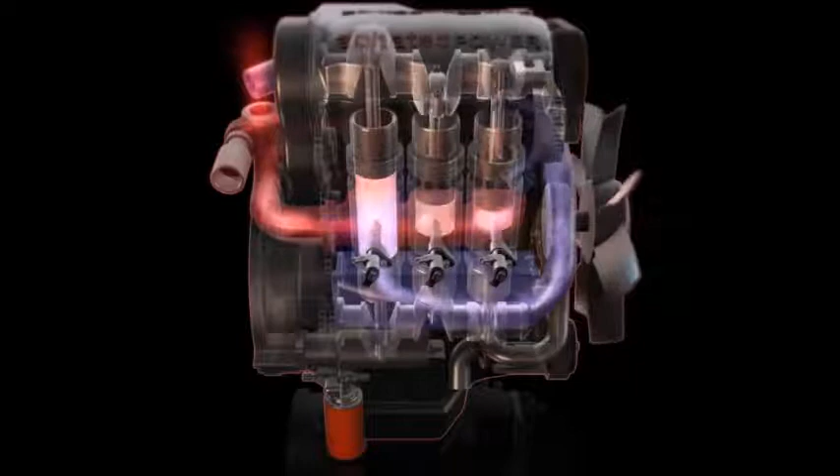Hello everyone and welcome. In this video we're going to be discussing the rather unique opposed piston engine that Achates Power is developing, which has shown to have pretty impressive efficiency figures.

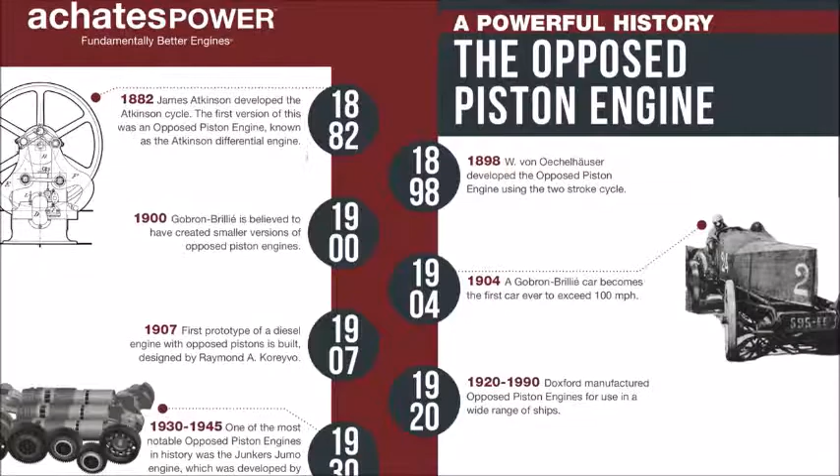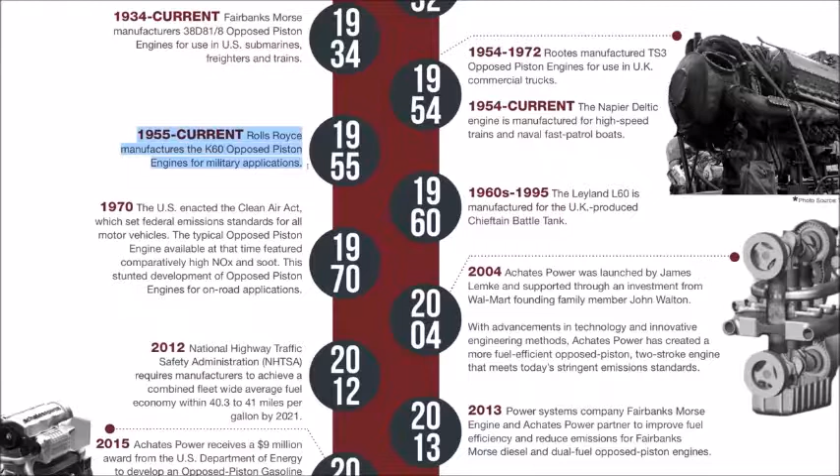Now the first opposed piston engines date back to the late 1800s, and they've seen use in ships, airplanes, submarines, tanks, trains, and other forms of transportation ever since. Rolls-Royce even developed an opposed piston engine for use in military applications in the 1950s.

Having a look at the engine, you'll see that two pistons move towards one another, meeting at top dead center where combustion then occurs. These engines operate as two-stroke engines, meaning every single time the pistons join in the center, the power stroke occurs, unlike four-stroke engines.

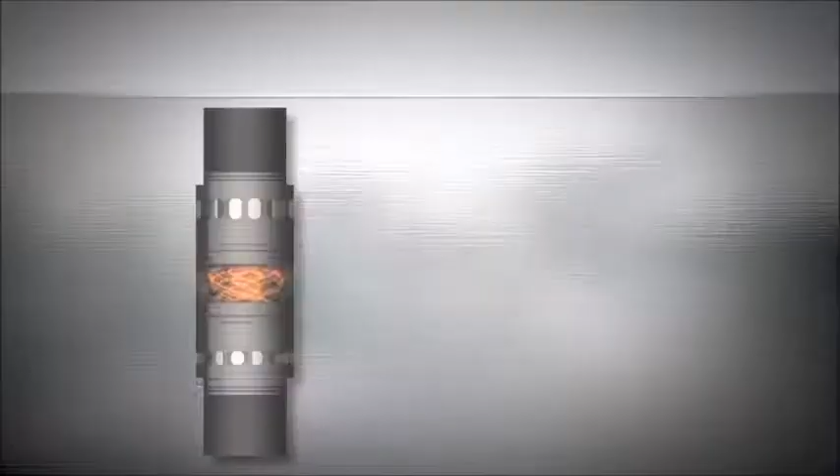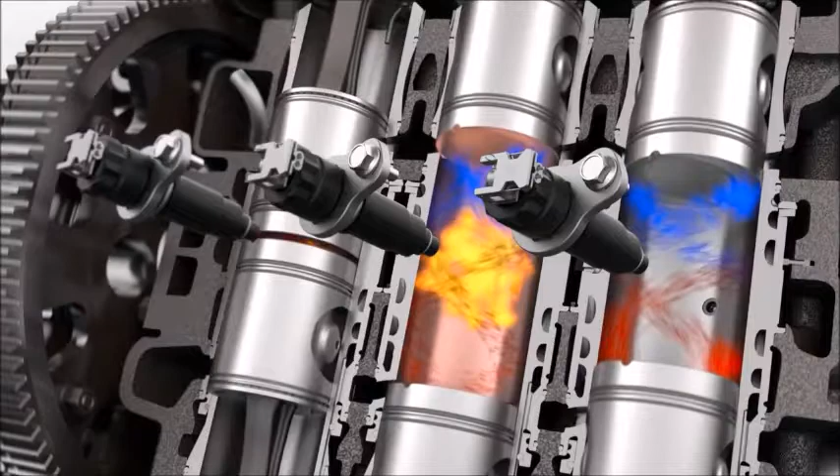The basics of how this engine works is fairly straightforward. When the pistons reach bottom dead center, fresh air is pumped in through ports on the bottom of the cylinder, while the exhaust is pumped out through ports on the top of the cylinder. The two pistons then move towards one another, and just before meeting in the center, diesel fuel is injected directly into the cylinder. There are two injectors for each cylinder, both facing one another on opposite sides. Combustion occurs, pushing the pistons back out, and then the cycle repeats itself.

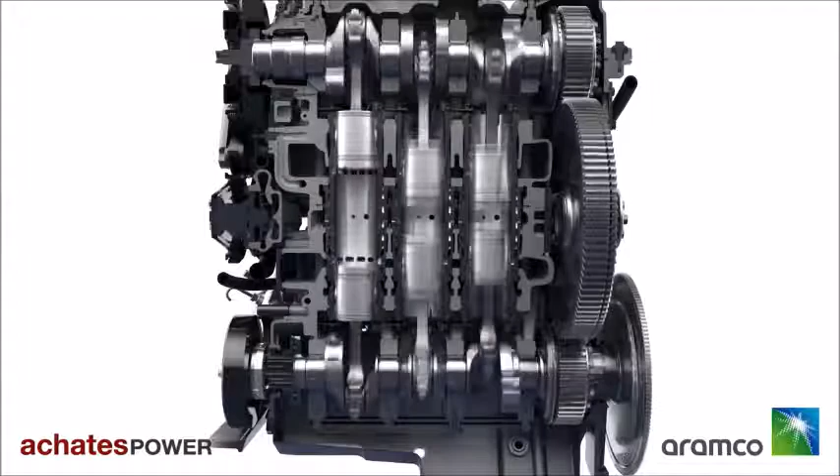The top pistons and bottom pistons each rotate an individual crankshaft, and these two crankshafts are then geared together to supply power to a single output shaft. Now, while having two crankshafts may seem like an additional complexity, this engine has no valve train, meaning no camshafts, rocker arms, valves, valve springs, and even no cylinder head.

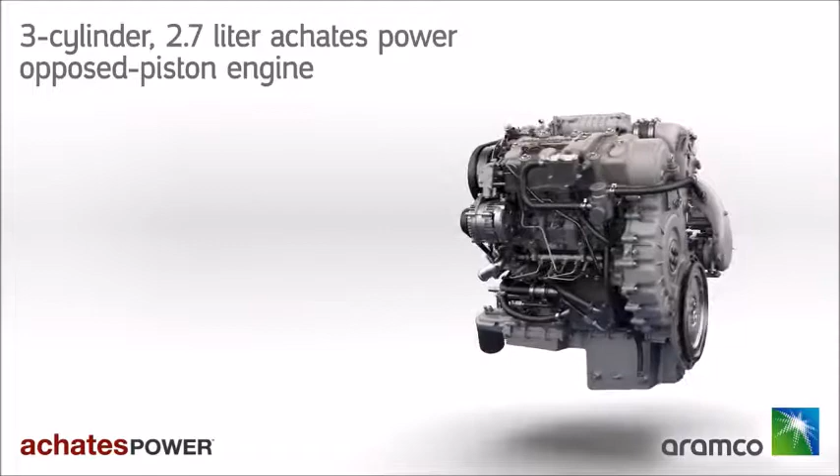This particular engine we're looking at is the Achates Power 2.7 liter 3-cylinder engine, which is good for 270 horsepower and 480 pound-feet of torque.

What makes this design efficient? Well, with the lack of a cylinder head, the amount of surface area that the combustion is exposed to relative to the volume of the combustion chamber is significantly reduced. Instead of transferring heat to a cylinder head, that heat is sent to an opposing piston, so more heat is used to generate useful work.

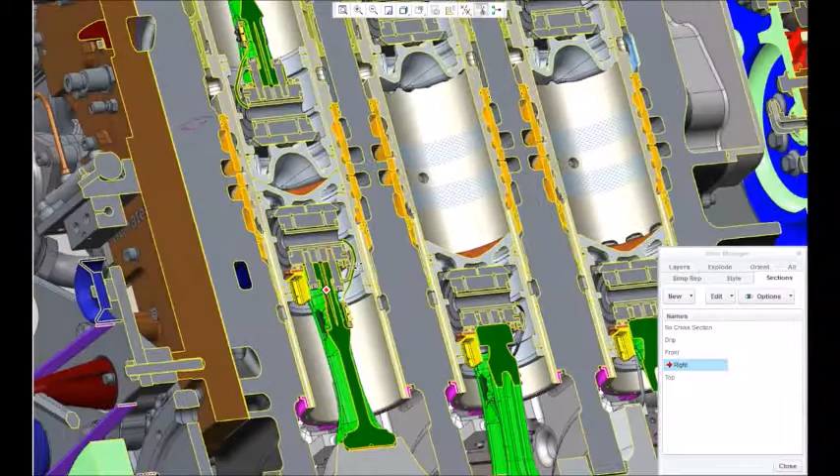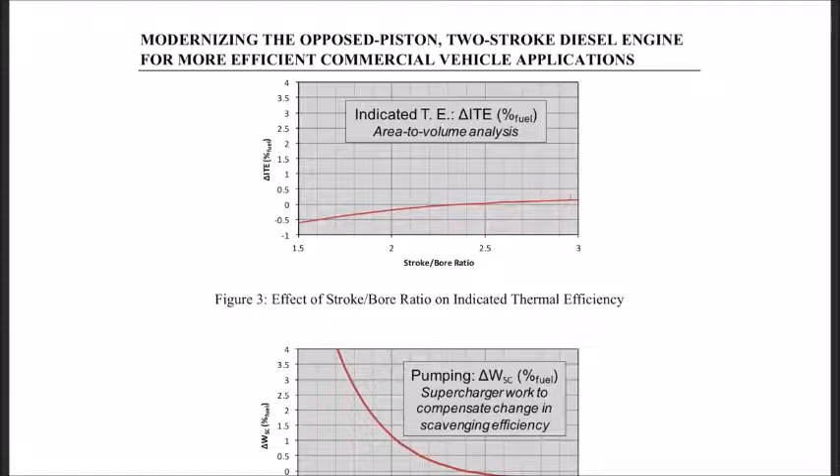Also, by splitting the total stroke length between two pistons, you're able to have a very high stroke-to-bore ratio without super high piston speeds, helping to extract as much useful work as possible. It's also possible to create an ideal combustion chamber with both piston tops, helping to create a fast-moving mixture and quick combustion. The two-stroke engine is supercharged to control intake air pressure, and it's also turbocharged.

The intake and exhaust ports are designed to optimize airflow scavenging. The exhaust ports are open first, allowing higher pressure exhaust gases to begin to exit. Once pressure has dropped, the intake ports are exposed and fresh air flows in while the remaining exhaust gases are pushed out. Both ports are closed off as the pistons move towards the center, and a small amount of residual exhaust gas is left behind.

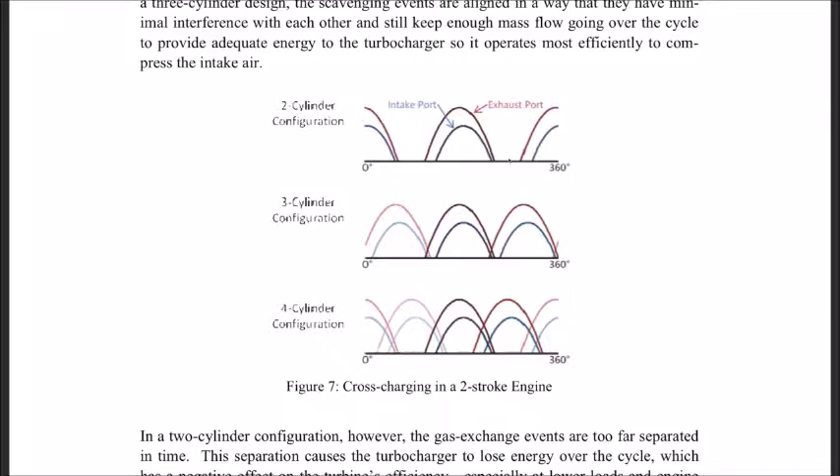You might be wondering why the engine has specifically 3 cylinders. From an efficiency standpoint, this is found to be the ideal setup. With just 2 cylinders, there are gaps in exhaust delivery to the turbocharger, which reduces overall efficiency, especially at low loads and low engine speeds when you're not producing much exhaust.

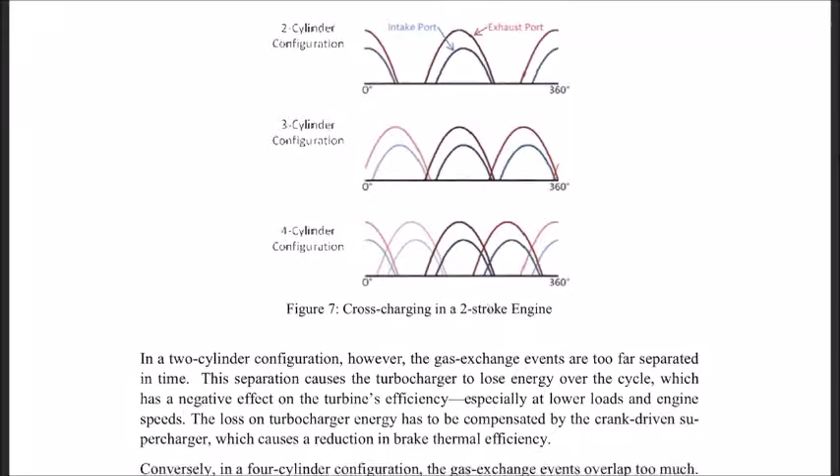With 4 cylinders, there is too much overlap between the exhaust ports opening in one cylinder and the intake ports opening on a different cylinder. This results in additional residual gas being left behind, decreasing scavenging efficiency, which reduces overall efficiency.

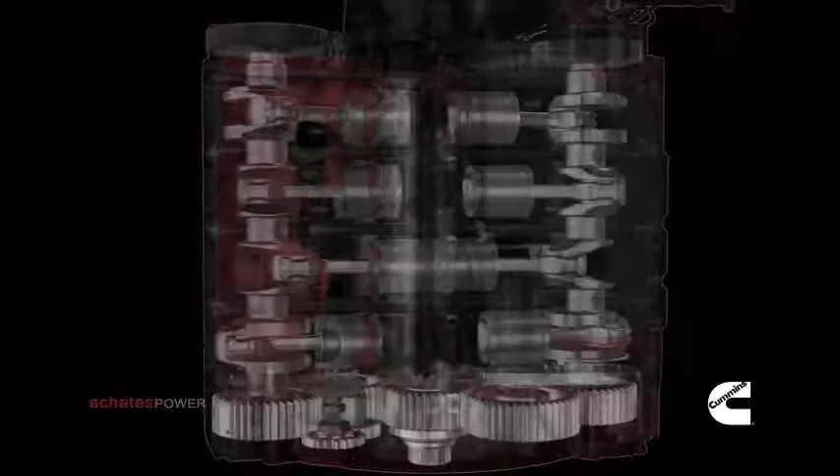Now, that's not to say that the engine can't be used in other layouts. 2, 3, 4, and 5-cylinder options are all acceptable, and Achates Power has worked on developing a 4-cylinder engine for combat purposes, but from an efficiency standpoint, 3 cylinders remains ideal.

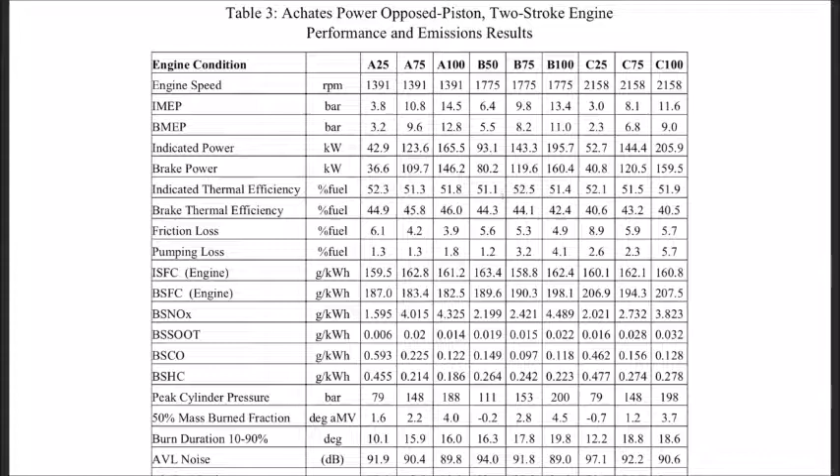Speaking of efficiency, test results show brake thermal efficiency remaining above 40% across a wide variety of loads and RPM, peaking as high as 46%. Indicated thermal efficiency doesn't dip beneath 51% for the various loadings tested. So the advantage here isn't just that the engine is super efficient, but that it remains efficient across a wide range of RPM and loading.

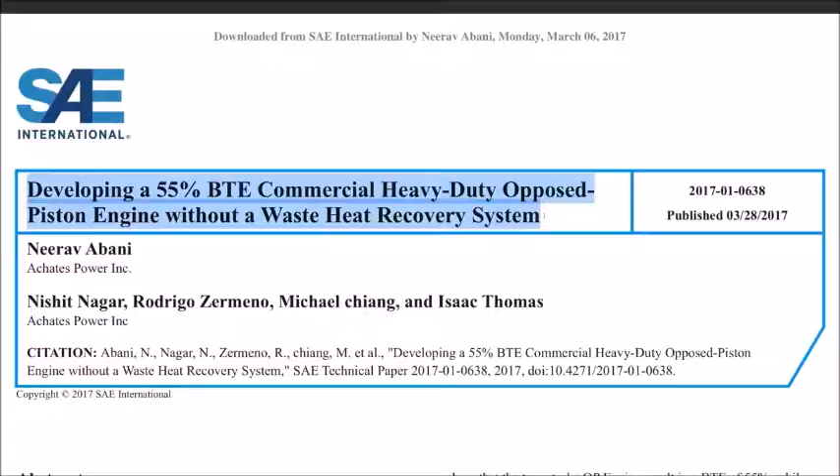Now, these efficiency numbers were achieved in 2012. Studies published in SAE as recent as 2017 have shown that brake thermal efficiencies as high as 55% are possible using 3-cylinder opposed piston diesel engines.

So the next and most obvious question, will we ever see these engines in production vehicles? Obviously, adopting new engine technologies can certainly be a risk, but we just might see them in the near future, as reports from the 2017 Detroit Auto Show indicate that 9 automakers have signed on as development partners, and at least one of them has started to implement tooling for producing an opposed piston engine in greater volumes.